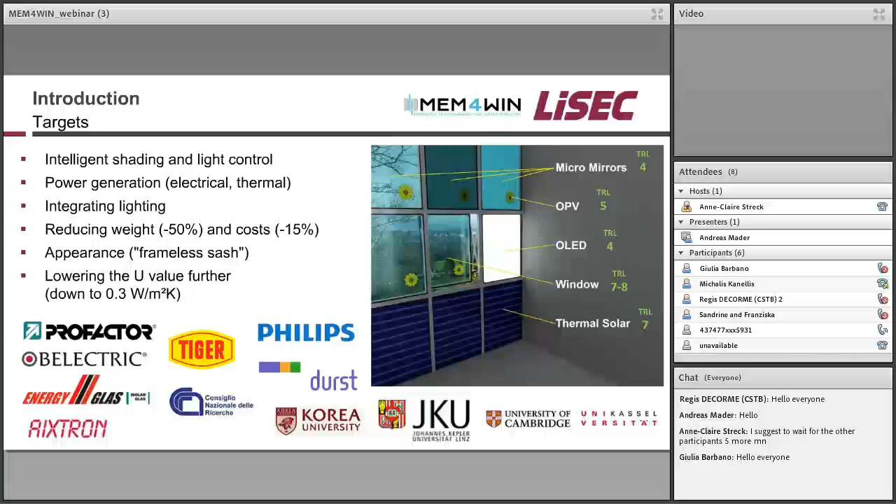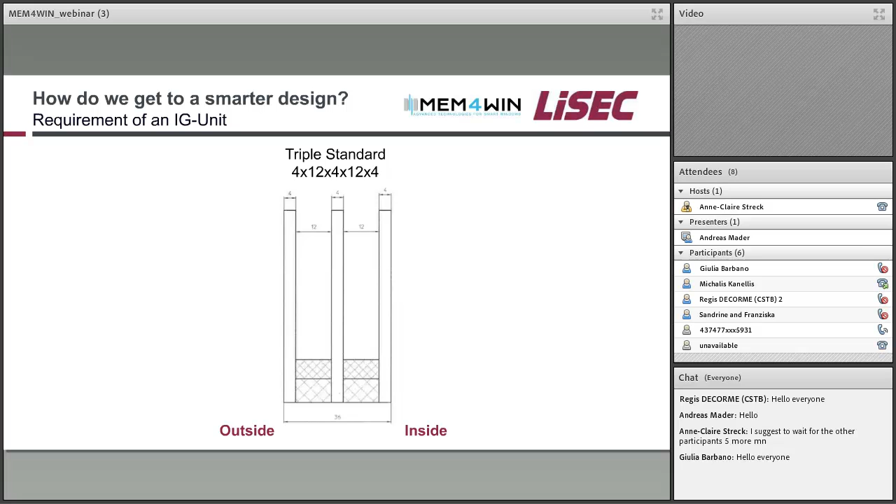What are the requirements of an IG unit? The standard IG unit you get on the market right now is triple glass with 4mm float. On the outside you have sun radiation, hot and cold temperatures, storm, and rain.

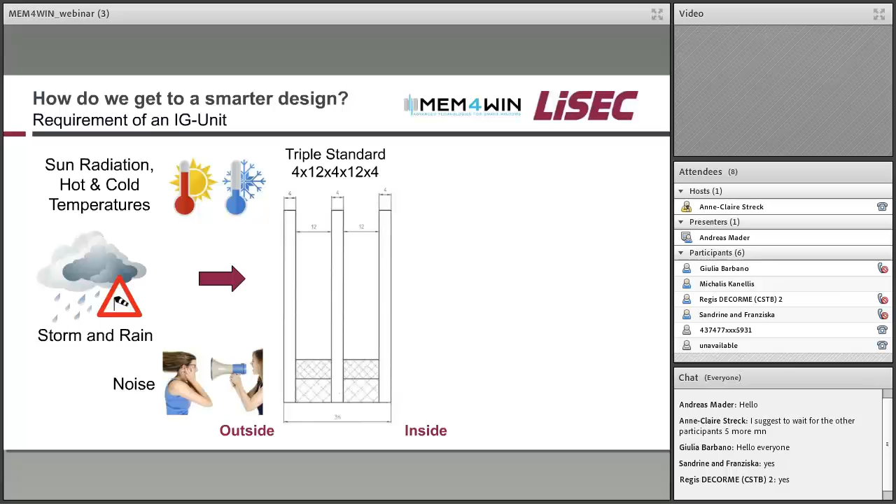Can you hear me? Yes, yes. You have noise, and on the inside you have safety regulations. At least you want to have comfort there, so you want to reduce the stuff on the left side, at least the noises. Hello? Yes, I'm... we hear you. Okay, perfect, I'm the only one able to speak.

Yes, and what we did for the dimensions of the glass: you need only to use storm and rain on the outside, and at least the safety regulations you have on the inside. So we dimension the glass to the storm and rain, and the inner glasses can be as thin as possible. If you use a safety glass on the inside, it has to be full tempered at least, so there will be a limitation. But on the other hand, there are no mechanical loads on it, and so you can do it as thin as possible.

And that's the way we did. So we took in the center 0.9 mm glass, and on the inner glass a 2 mm glass. On the outside, the standard glass you would use right now.

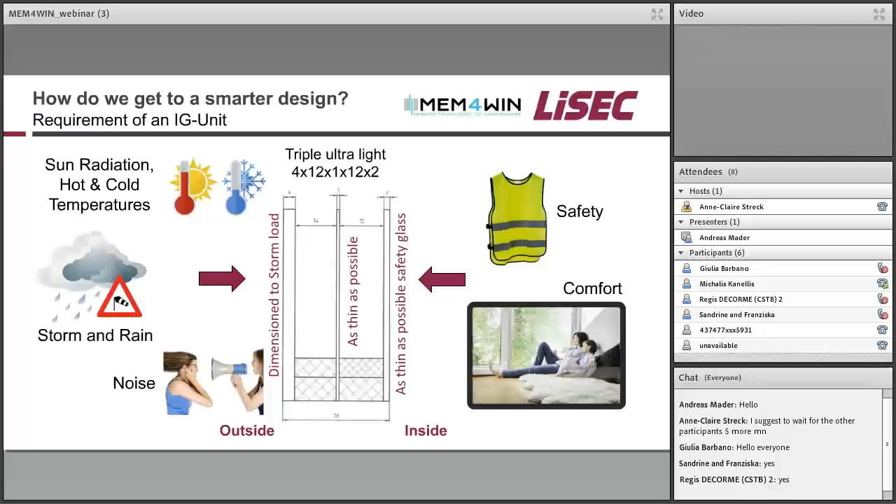So, yeah, the presentation. So, the ways to dimension the glass on the real requirements, and to get thin glass in use. And to get it in use, you need to temper it. Otherwise, it's very fragile and will break very fast.

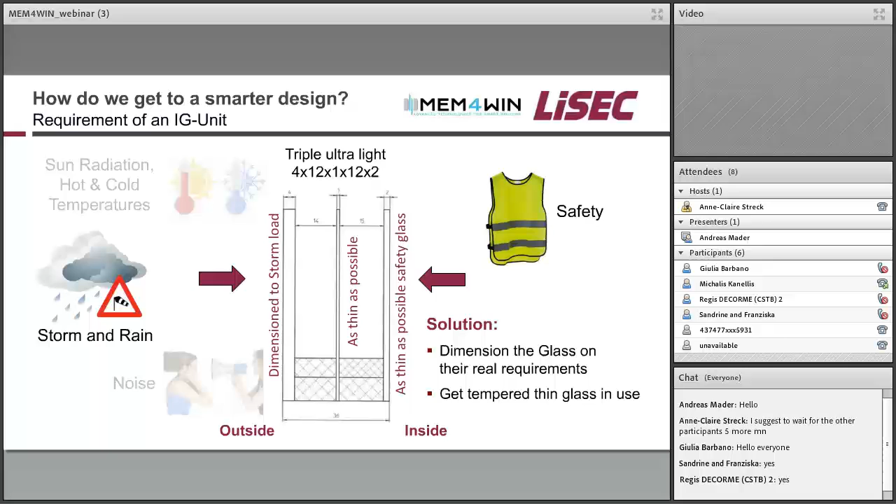So, the market opinion which we took was: if you use an extra sheet after a triple to get the quadruple IG unit, to get better performance values, if you use there the standard 4 mm float glass, you have the problem that you will get a bad U value, a bad transmission, a very low durability, a high weight because of the extra sheet, and a very high energy consumption in production. This was the opinion the market tells us.

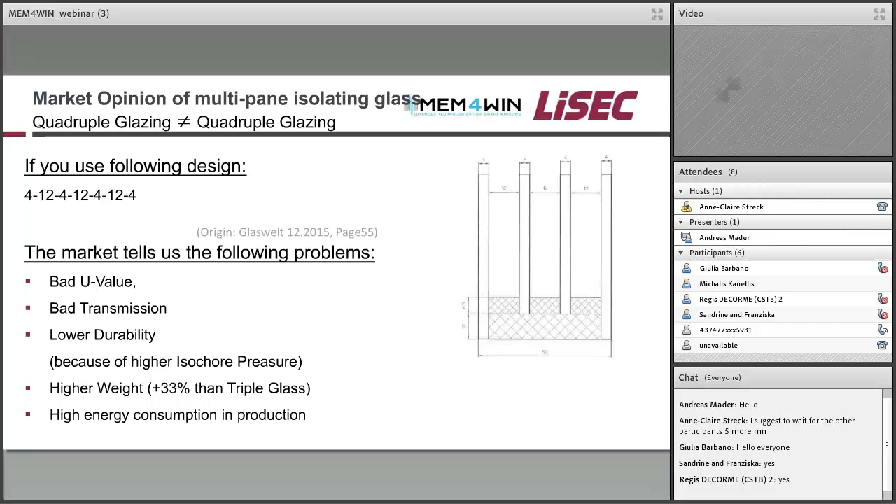And we say, yes, if you use this design of the window, they are really right. So, is there another concept, or is the concept of an additional glass the right solution for us? And we think yes, but with another design.

On the left side, you see a triple glass with the standard glass right now. You see they use 4 mm of glass. If you reduce the glass to the real requirements, you see that you get spaces for the gas on the inside, which give you a better performance for the U value. On the center glass, you see, this is a possibility which you can use right now in the market. You have there the standardization. On the right side, you see a future solution with a 0.9 millimeter glass in the center.

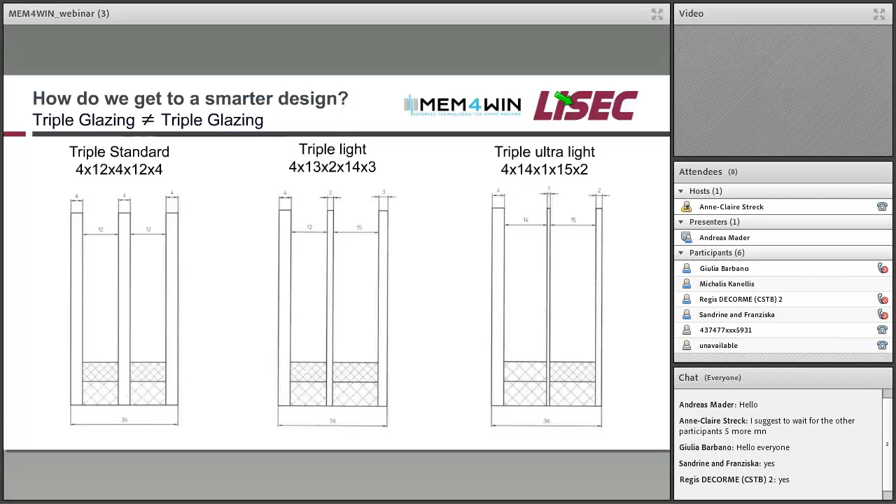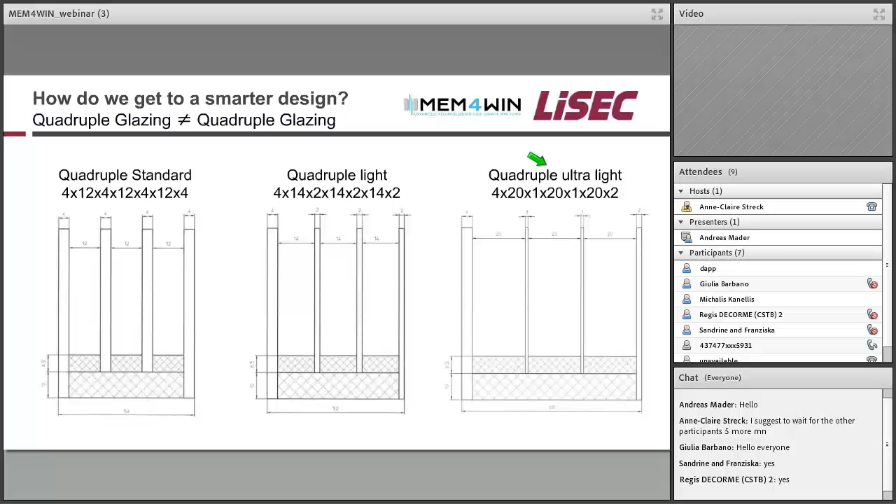And the future glass will be a quadruple IG unit with 70 millimeter width and a 1 millimeter glass in the center, because you want to get to a U value of 0.3 with argon. We use argon because krypton has 600 times higher energy consumption during production. So that's why we use argon. You have there a glass which has a really good performance and a low energy consumption in production. So, and why this works I can tell you right now.

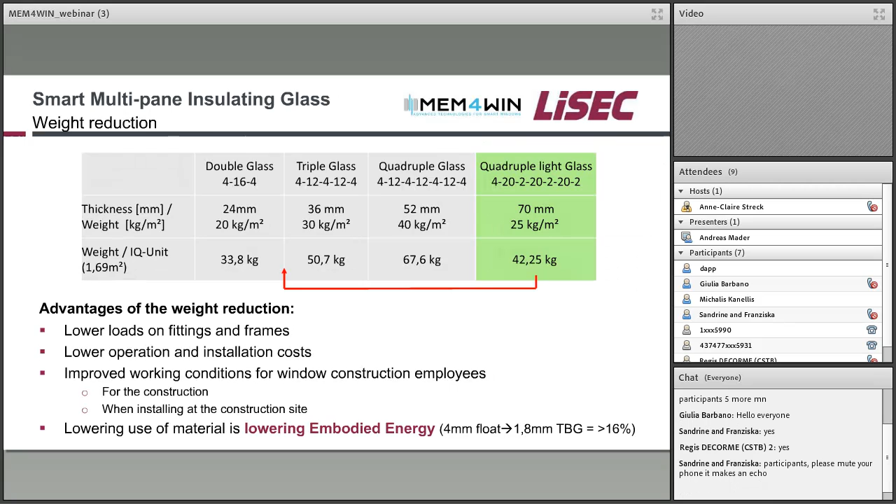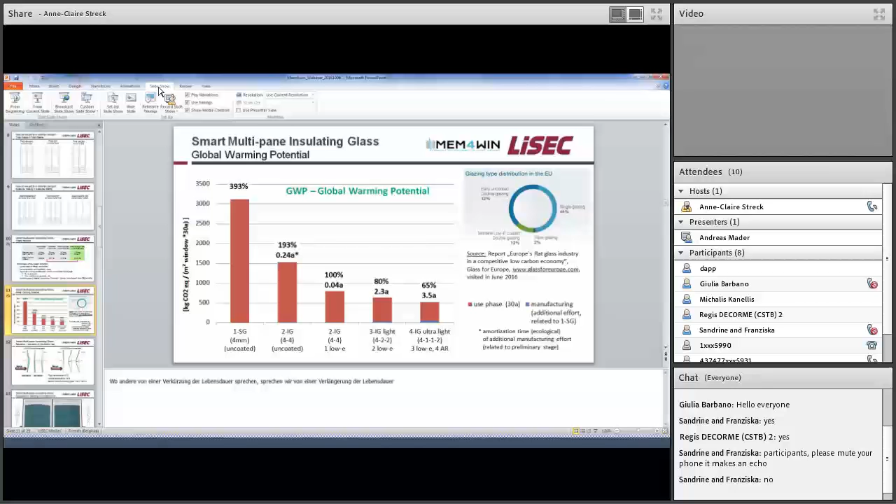Yes, Andreas, not yet. We don't see the graphic yet. Is it possible to get them? It was on your presentation? Yes. So we should see it. I don't understand why. It's a big graphic, which should be here. It's about the potential of carbon footprint. I don't know why it doesn't appear. Let me check on the presentation. Slide number 11, right? I will try to show it from my screen. Just a moment, I'm doing the change. Share my screen. Yes. Perfect. Thanks a lot. And then I will switch again to your presentation. It will be more convenient. Okay. Perfect.

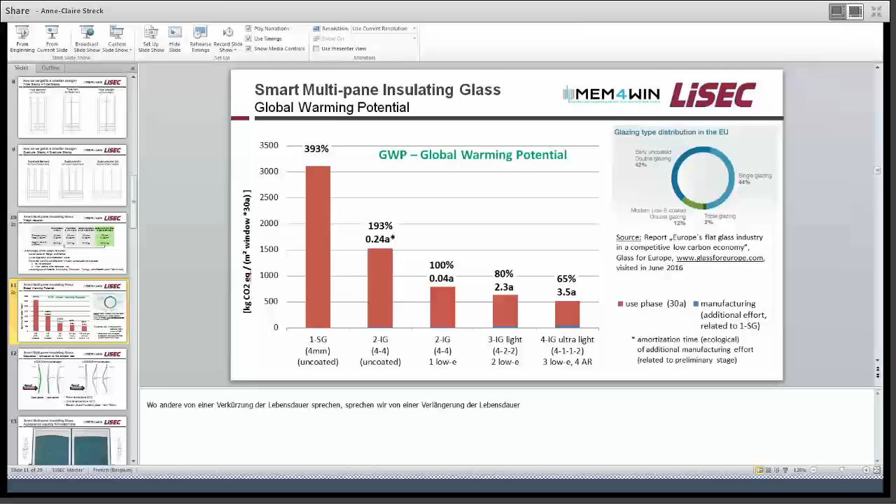So. Do you already see anything? I mean, we see my screen here, so we see the graphic. No, no. The one don't see it. Okay. Just let the window like before. It's okay. It's only a few words there. Just remove the full screen mode. Okay. So now we are on your presentation again, but the graphic is still missing. So if you wish, Andreas, I can go back to my screen. Yeah, it could be small, so it's no problem. Now it's working. You see it? Yes, we can see. Okay.

So on the left side, you see a single glass with 4 millimeter float, uncoated, and in the center you see a double glazing with 1 Low-E coating, which we used as the starting point. And if you see there, a single glass uses four times more energy in the whole life cycle than this double glazing with 1 Low-E coating. So it's really a huge amount of energy you lose over time.

If you see on the right side, on the top, you have a graphic from Glass for Europe which tells you how much single glass is in use in Europe right now. And we have 44% of single glass in use. So if you use standard technologies which are on the market right now, at least double glazing, we have a big impact on the carbon footprint goals of the European Union.

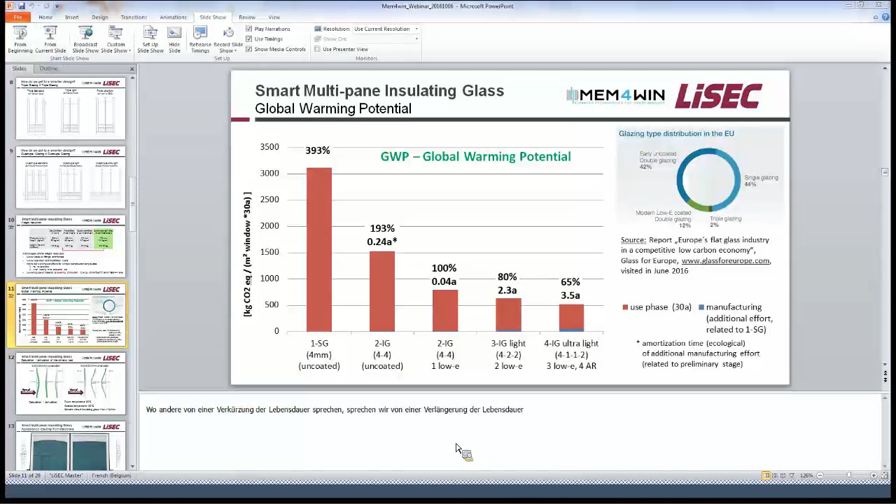Good. So, for me it's okay, you can change. Okay. So I go back to the presentation. Right, you have the floor.

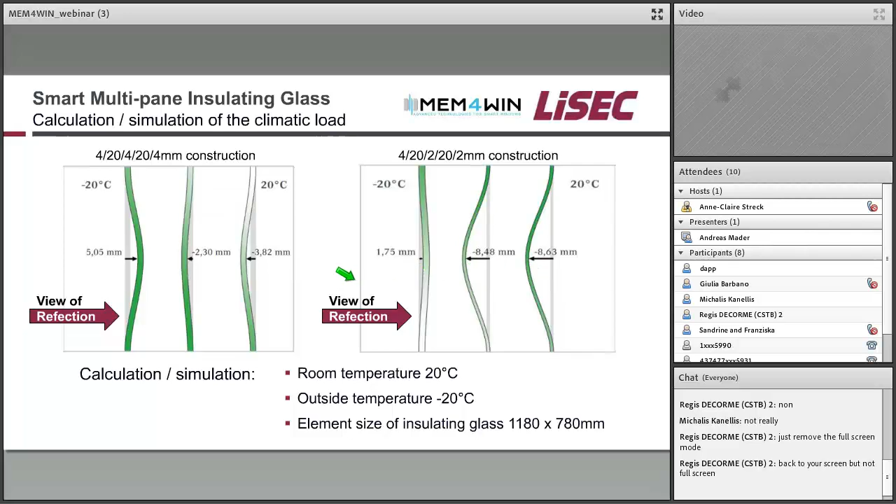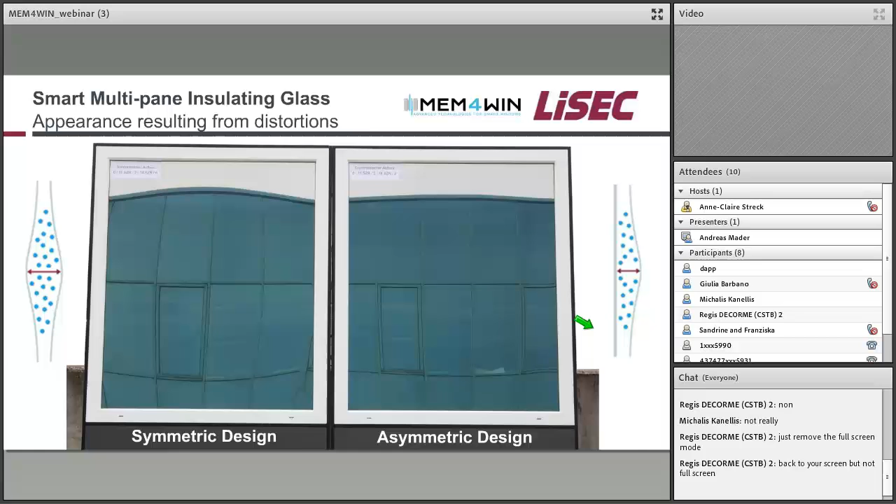The other option we can do is, for the openable window, we don't need a frame. So we can use a frameless openable window, which we have shown in our facade stand. There we used for the device an automatic system, which is standard on the market. We used profiles which are standard on the market. So we used only the new technology for the IG unit.

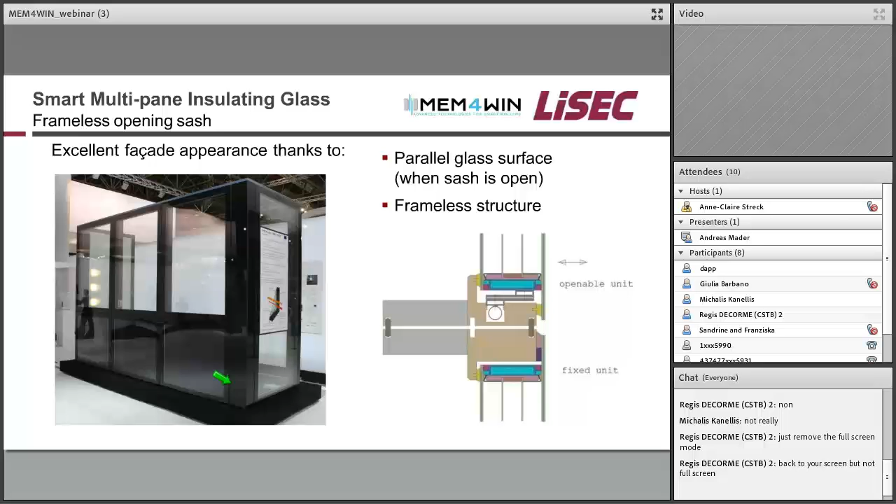But you see on the left side there is no difference between openable and not openable window. On the outer side we have windows which are not openable, and the centered glass which is openable, which could be interesting for the design of a facade.

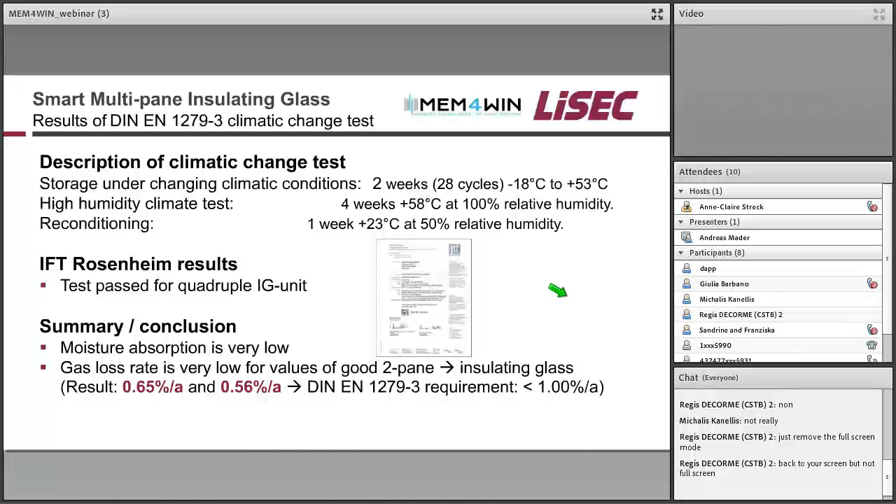A very important thing: the innovation on the quadruple IG unit was that we were able to pass the climatic change test. Normally some double glazing has problems passing the limit of 1% a year of gas loss. And we had two tests there. One was 0.65% a year, and one was 0.56% a year, with the full package of 70 mm of IG unit in the standard test from 1279.3. So we have a very long durability for our quadruple IG unit.

The next thing I want to tell you, we use tempered thin glass. The standard technology on the market is a roller furnace technology. We use an air cushion system where we have a symmetric energy input, so the energy input is from the top and from the bottom. We are able to use the energy input on the maximum of convection, which is very energy saving and very fast. We have no touch to the glass, and you can see this influence on the surface of the glass.

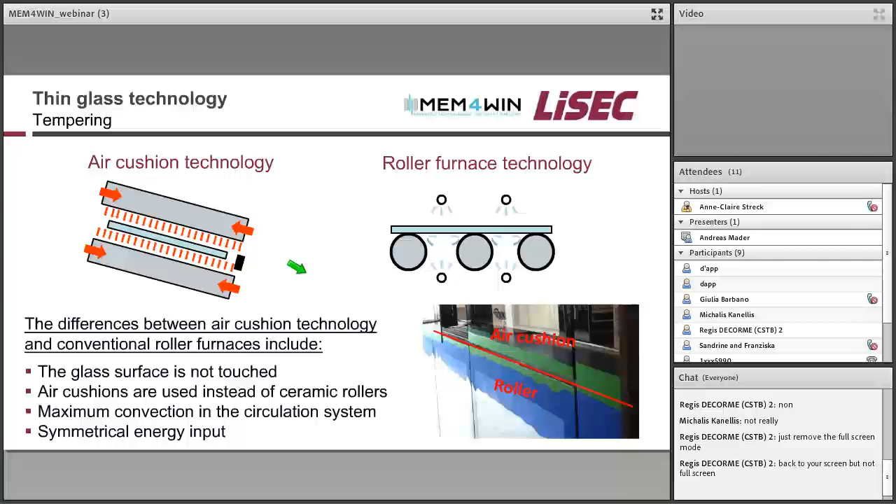If you have a look on the right side, on the bottom, you see the air cushion system is on top and the roller system is on the bottom. You see there are a lot of roller waves, which we don't have in the air cushion system. So there is a really big difference as well in the near optical view of the glass. And we can save up to 40% of carbon footprint in the tempering production.

The status quo of the use of thin glass for IG units is that the thin glass regulation changed in September of last year. Therefore, we are able to use a 2 mm glass for the tempering in the air cushion process. We tested the quadruple IG unit to 1279.3 part 2 and 3 and passed all these tests.

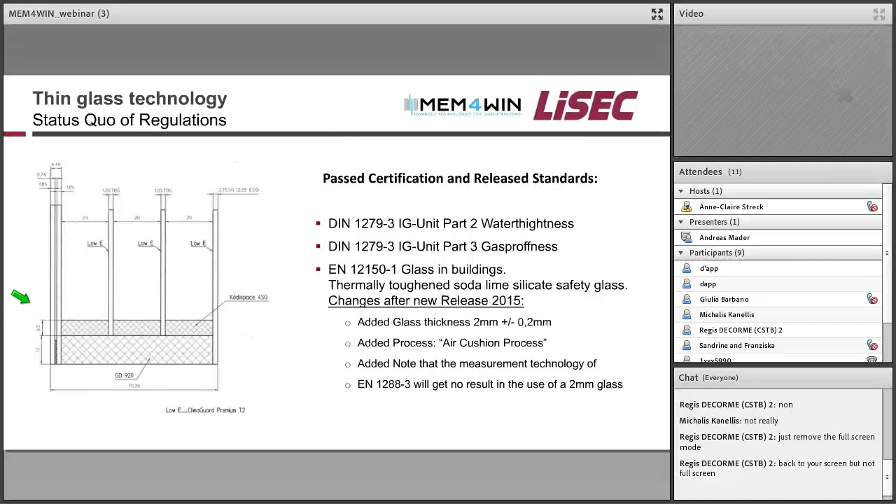The next step: if you use this IG unit in a facade, you have to put in some laminated glass, at least for safety regulations. We also use this lamination process to get functional integration into the IG unit on the outside or on the inside.

We use a technology where we are able to do an edge sealing on the outside. This edge sealing has 700 times better water vapor diffusion than a standard lamination process where the foil goes to the outside. And the second option is that we are able to use other foils, because we don't have to take care about the water tightness of the foil, because we have another sealing method.

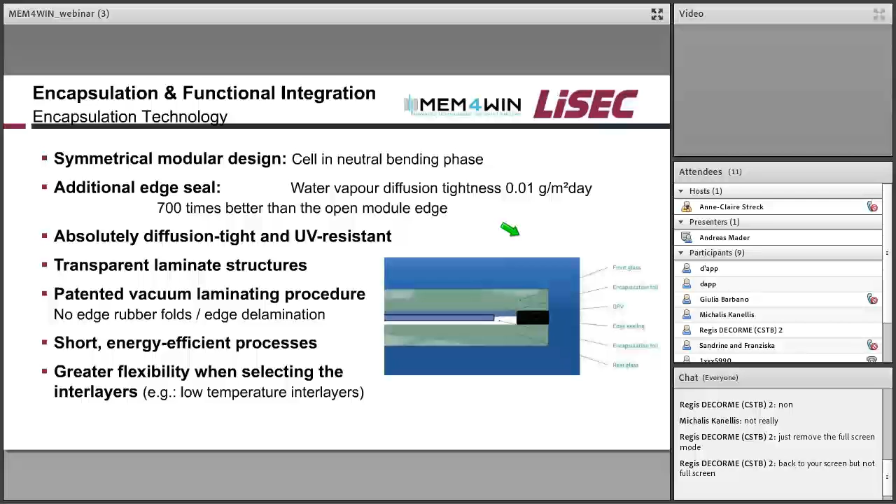We can take care of the lamination advantages of this material. So we are able to use materials with less than 100 degrees of lamination temperature, which is very important for sensitive electronic materials like OLED or OPV, which are very sensitive to lamination temperature. You can see here an OPV from our partner Belectric on the left side. On the right side is the OLED from Philips we used in the demonstrator.

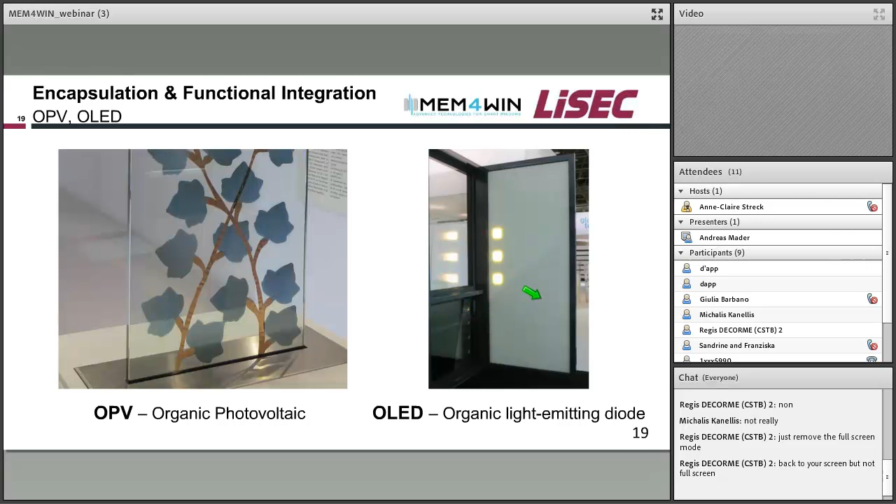And we passed all the tests. OLEDs are very sensitive to oxygen diffusion and water vapor diffusion, and it's really a high quality encapsulation system because we're able to use these materials in it.

Another function we used in the MEM4WIN project was the micromirrors. The micromirrors are produced at the moment at 10 by 10 centimeters in the lab, and you see in the closed state it is really dark. The mirror material is aluminium, so it's like you have a thick aluminium coating on the glass from the reflection, but in the opened state you have a really high transparency.

Therefore you see these are very small micromirrors. Their distances are about 60 micrometers, and to regulate it, you put in 80 volts of supply voltage. You don't need any energy if you hold the status quo. It needs only the voltage.

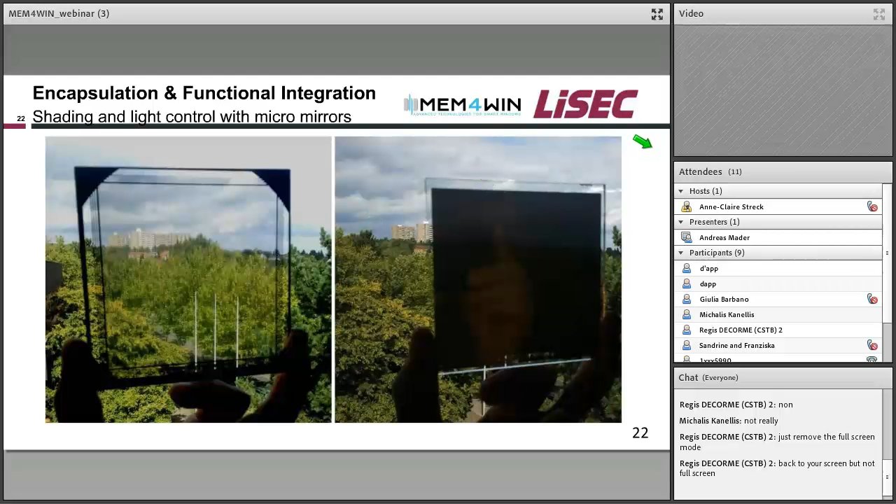If you are changing the position of the mirror, you need a low energy. So it's very energy-saving. And this makes it possible. Here you see a demonstrator of the micromirrors. On the left side it's opened, on the right side it's closed. And you see it's not only for shading, you can also control the light, how it gets into the room.

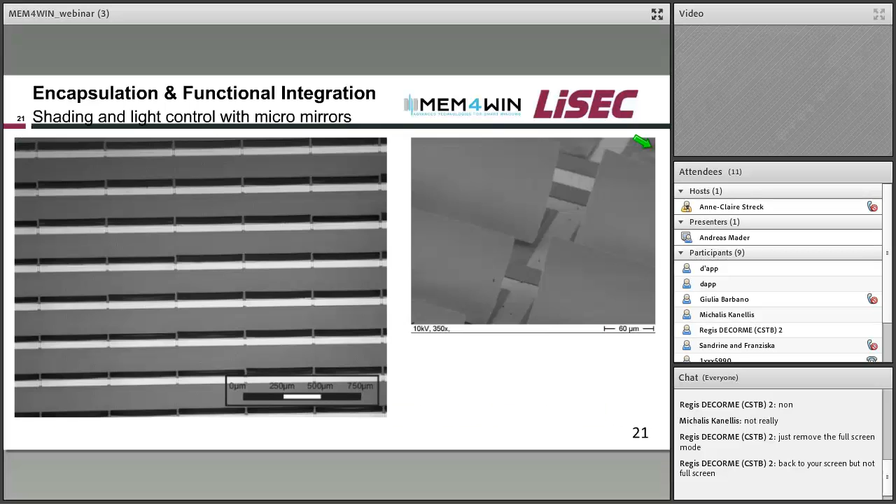If you use an angle like you have it right here, you can put the light onto the ceiling of the room and get the light in.

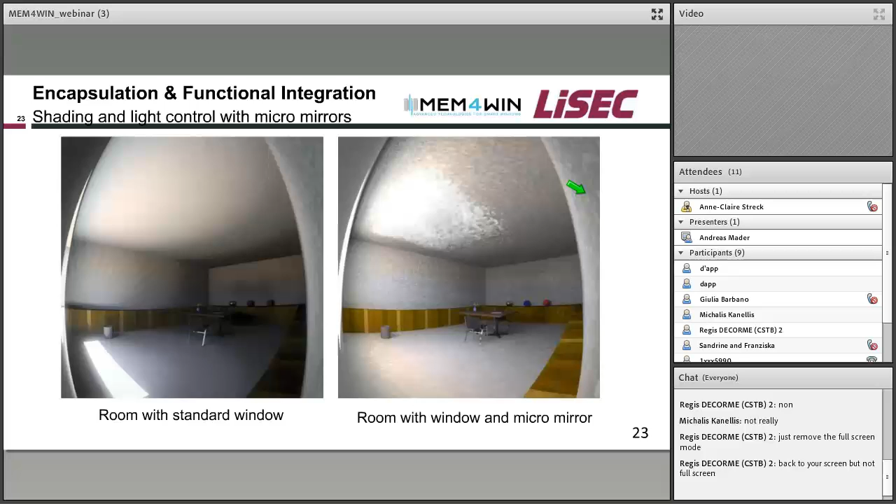Another demonstrator: these are 3 of the 32 demonstrators we made in the project, where we want to show sellable products. We decided to put them in 2 categories, one which are sellable, one which are technically possible solutions. Here we see the sellable products.

The solar thermal collectors are sellable. They have a high TRL. We have an optical efficiency of more than 80%. In vertical implementation, we have in this demonstrator a functional piping system. We have the OPV and the quadruple IG unit with the 2mm glass.

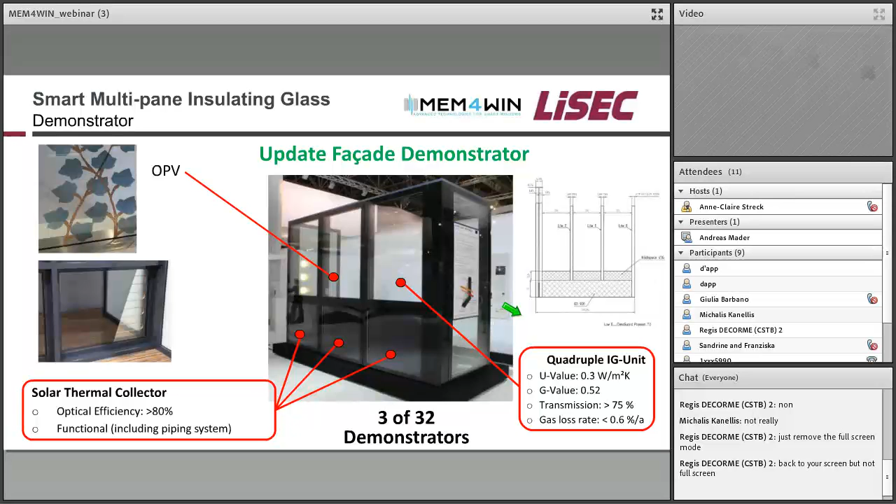And you can see, if you use a smarter design, you can integrate functional stuff with a low-cost solution. You have a U value of 0.3 watt per square meter Kelvin. We have a very high transmission. If you use anti-reflective coatings in the glass, you can get a higher transmission than a triple glass. We have a very high durability.

We have a very low weight, a very low carbon footprint, and if you use a smart design, you also have a very high optical quality of the facade.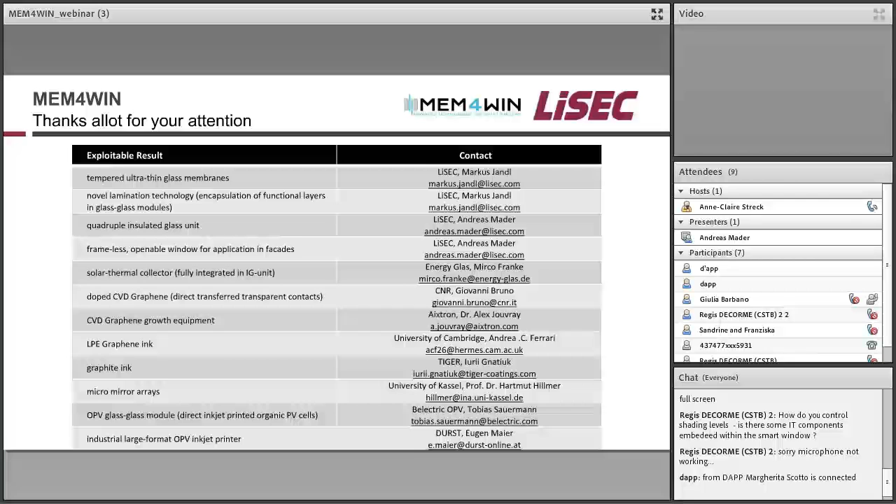So I just wanted to stress the opportunity we give to EeB PPP projects regarding the ECTP conference. I guess you all know the ECTP conference is taking place next month in Brussels on the 17th and 18th of November.

So we thought it would be a good idea to exhibit some innovation cases on a booth during these 2 days. Innovative proposals from the EeB PPP projects are of course very welcome and will be given priority. So Giulia, Michaelis, I think Michaelis left, but if you have any proposal, just drop me an email and we can propose you to present your innovation among the EC representatives. The EC representatives are very keen on seeing such innovations being presented and communicated. So I just wanted to highlight this opportunity for you.